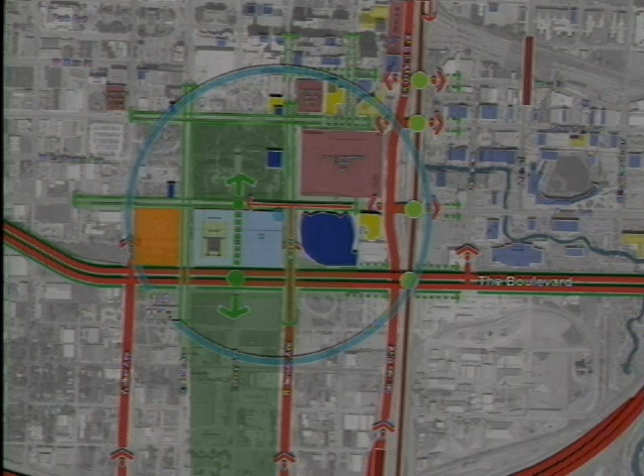We also developed very basic planning diagrams for the building on the site to confirm that the program fit and that everything worked.

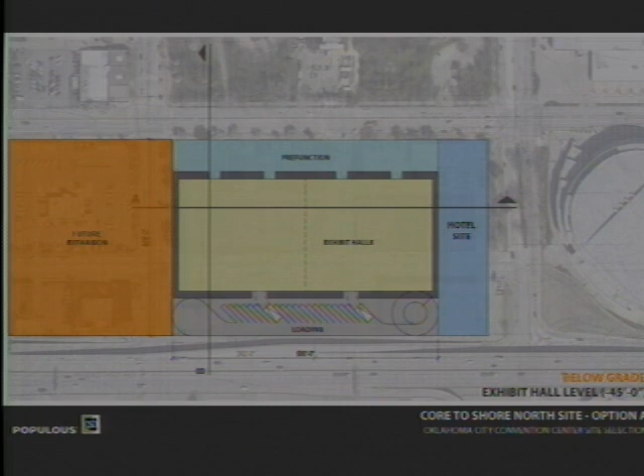We developed several development options for the recommended site. The primary option involves dropping the exhibit hall below grade—the windowless portion of the convention center where trade shows are held—so loading and the exhibit hall would be below ground, while the ballrooms and meeting rooms with pre-function halls and lots of glass would be at street level. This allows a truly 360-degree building with no back door visible.

Because of this site's proximity to the Myriad Gardens, the new boulevard, and the arena, there's no obvious back to the building, so this strategy lets us treat all sides as the front. Above that are additional meeting rooms, and you can see the future expansion parcel and hotel parcel on the site.

This diagram shows how that arrangement works, with the large windowless space below ground and a glass box above ground. Importantly, much of the building mass is buried, so it will look dramatically different from the existing Cox Center. The convention portion of this building would only be about 50 feet tall, with a lot of glass, windows, and street activity.

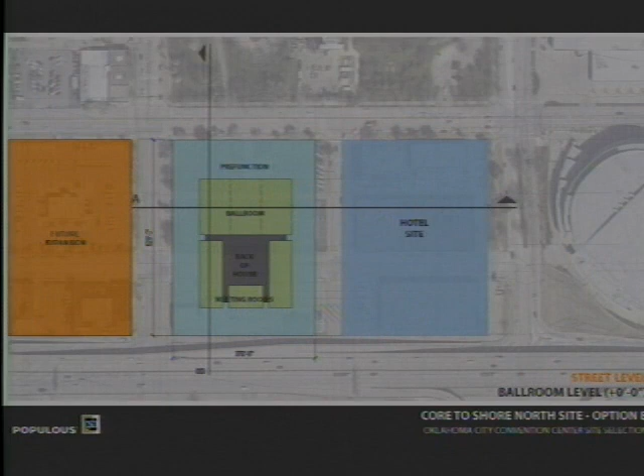We also studied another option keeping the 360-degree exposure at ground level, placing the exhibit halls on top, which allowed the Harvey Street spine to continue through the complex. This diagram shows that elevated exhibit hall arrangement—it makes the building taller but doesn't use a below-grade exhibit hall.

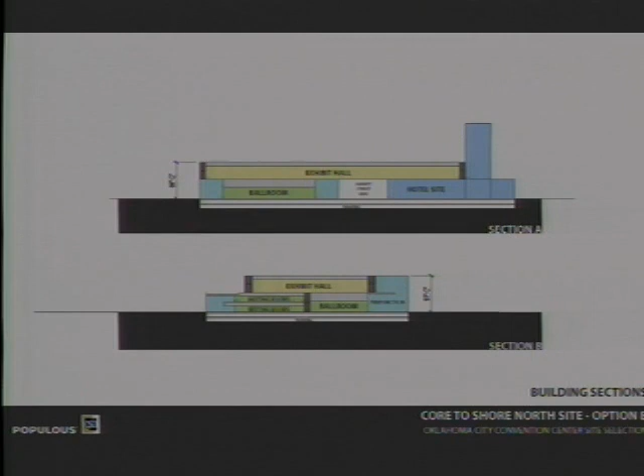We communicated with Flintco and others who have built extensively downtown to test the feasibility of these strategies, and we feel confident in both the costs and technical feasibility. These are some basic diagrams developed to illustrate these ideas.

This is option A. You can see the illustration of a 360-degree building with the hotel adjacent, and the gap running between them, which continues the Harvey spine from Myriad Gardens through to the new Core to Shore Park to the south.

Forgive me, let me scroll back to that graphic. There we go—you can see that spine at grade passing through the block, with the hotel offering great views overlooking the gardens and the park.

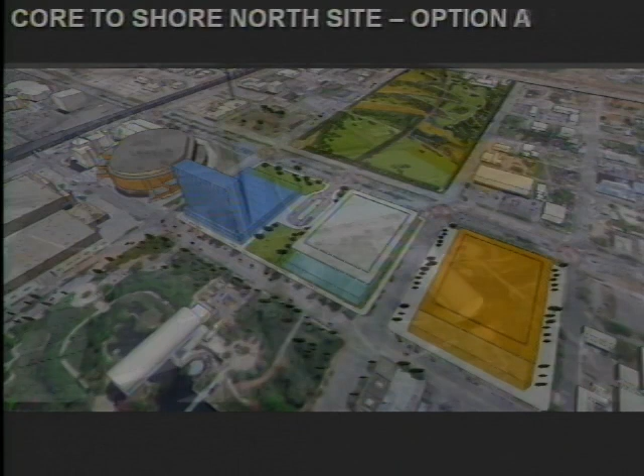This is another option in which the exhibit hall is elevated—you can see it expanding to the west over Hudson, with the spine passing between the hotel and the convention center.

Another option we discussed was that at some point in the future, when the exhibit halls for the existing Cox Convention Center were no longer needed, we could occupy the southwest corner of that existing Cox site as a potential hotel site, and leave some open space on the end of the convention center site to connect the two parks, and also connect us more with the Ford Center, potentially becoming a grand outdoor space. When we win the NBA championships, that's the place where everybody spills out into the street and has the street party.

So some thoughts about how we might develop this site. When the project goes into full design, these will be developed and refined, and an actual design solution will be proposed.

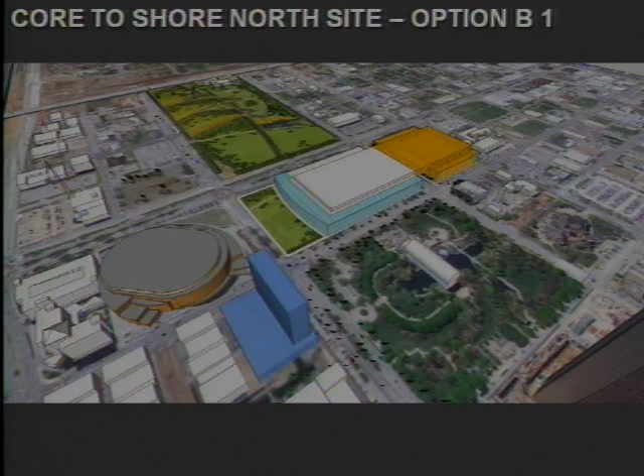Through the process, we created a list of pros and cons for all these sites, enumerated here. Proximity to the existing parking stock, restaurants, and hotels were important. This is an incredible civic address on the boulevard, on the park, across from Devon Tower, adjacent to the Ford Center—a great front door for a substantial building that will represent our city.

We felt like the strengths, both intuitively and objectively in our scoring, were evident. We were thrilled that the Convention Center Subcommittee, when we brought this recommendation, voted unanimously in support of it. So we felt there was a lot of consensus that this was a really strong site.

That is a quick tour through our process and the results of our analysis and selection, and I invite any questions you have about the work that's been done. Are there questions?

Eric, you have any comments you want to add? I think the only other item I might add is with your recommendation for approval today, this would be scheduled for the City Council meeting on July 5th. We would then have another presentation made to Council at that time with the full report, similar to what we've seen today, to make sure Council fully understands the process we've gone through since February. But with that, that would be our next step.

Ryan, I want to make sure I understand this—I think I do. The options that have been presented are still out there to be decided. The only thing we're deciding today is the recommendation for the location. Correct. That will be further studied, and there will be more recommendations made later, but the only thing we're looking for today is a recommendation on this particular site.

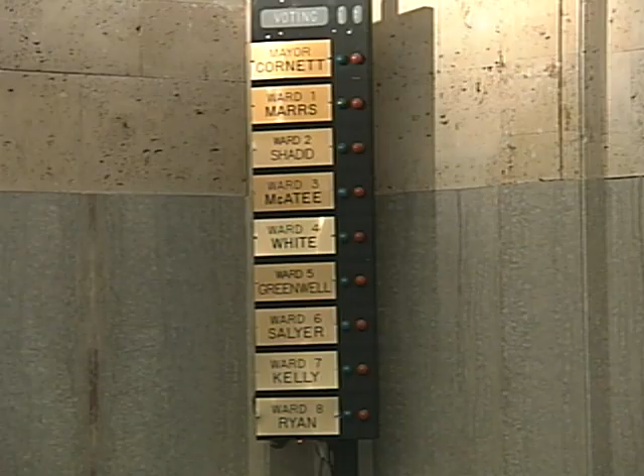If there's no further discussion, all in favor say aye. Aye. Opposed, say no. The recommendation is adopted, and we'll move forward to the council for their action.

I think Eric said on July the 5th. Thank you for your interest and your attention to this. Ryan, thank you for your presentation.

We appreciate that. Item B under reports is relating to the River Racecourse lighting improvements. Eric, you want to brief us on that? I'd be happy to. We are moving very quickly ahead on two of the early start projects for the Oklahoma River.

One of those is the River Racecourse lighting project. As you recall, we engaged Garver engineers to develop a plan, and they have now completed a preliminary report, about a 30% document when we look at the overall scheme of things. What's included in your packet is a draft report. They have since completed that report, and today we're asking for you to allow us to move forward with the completed report, taking it on to City Council.

There were very few changes between the draft and the final. It was mostly just a final review going through the subcommittee. The subcommittee considered this on the 14th and recommended its approval as well. We have Curtis Brown with us today from Garver, and he has a presentation to give to you and can answer any questions you might have.

Thanks, Curtis. Pleasure to be here. A quick overview of the race course lighting project: we are lighting the river basically from Byers Bridge all the way to in between the I-35 bridges, which is the 1,000-meter mark. We are going to be establishing both practice level, which is base level lighting, and event level lighting for the higher profile televised events, which was the desire of this project.

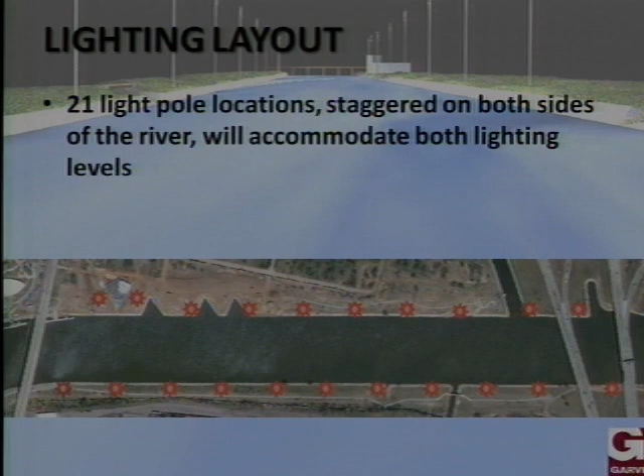The layout from our early design was 21 light pole locations, staggered on both sides of the river, and this layout will accommodate both lighting levels. No additional poles are needed. If you go to the higher lighting level, you just add some luminaires on top of these poles, and I'll discuss why that is in a moment.

There are 10 major points of service that OG&E will be coming to. Each one will serve 2 or 3 poles as it goes through, and those will be controlled by a wireless controller where the central hub is located back in the finish line tower, where each pole or series of poles can be controlled through that network. That's a general overview of where we started and the concept of this.

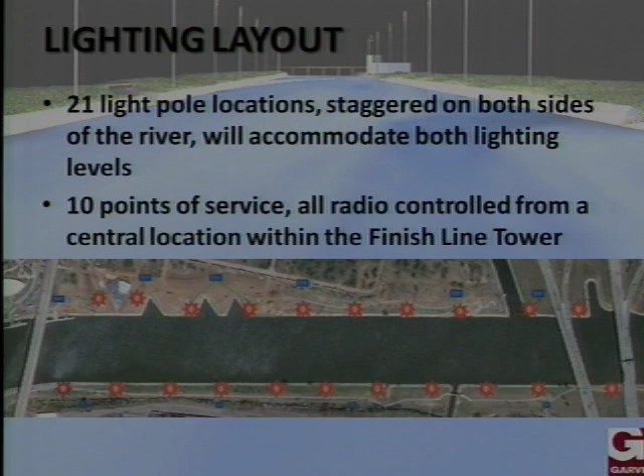The lighting controls, some of the desires were to have flexibility, not only for the base level lighting, but for the event level lighting, future architectural or special lighting, and also PA, television systems, and others. So the main controller will be expandable, with different modules, controlled through a touchscreen interface, and also have a link through other wireless controls so somebody does not always have to run up to the finish line tower to control the lights, but through an iPhone app, even be able to control the lights down on the race course and turn things on and off.

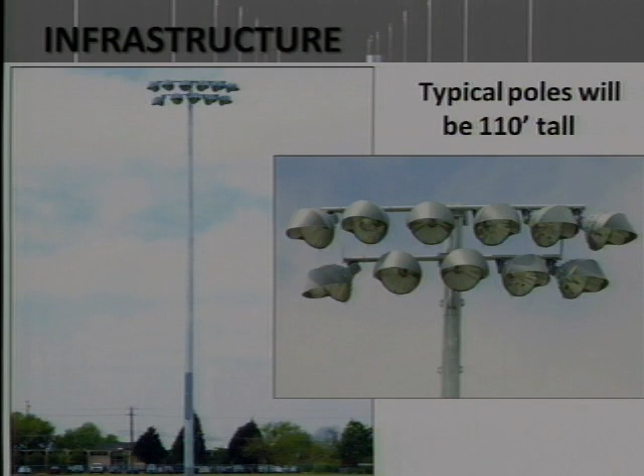A typical light pole we're looking at is the example right here. They're about 110 foot tall with luminaires similar to this located on top of them, and again 21 of these all the way down the shore.

The interesting part of the conceptual design is really trying to discover what we needed to light the river at. There are no industry standards for rowing, kayaking, or other nighttime events. This is the only venue of its kind in North America, so these standards aren't set. We looked at other venues and set a base level lighting for our first pass at 30-foot candles, and a televised event lighting of about 75.

This was determined because most NCAA sports and arenas have lighting levels in excess of about 100-foot candles, with lower levels for practice, but NASCAR, for example, has lighting levels around 30 to 35-foot candles, so it's a pretty wide range. It really depends on the size of the target object. Like a baseball arena, a very small object moving very quickly across a very short distance, you need a very high lighting level in order to be able to pick that up on cameras and visually.

While NASCAR involves very large objects traveling on a 2-mile track, relatively slow relative to speed, they can have a little lower lighting intensity and still have very good visibility. So we kind of weighed these factors in on the sculling and kayaking events, and that's where that came from.

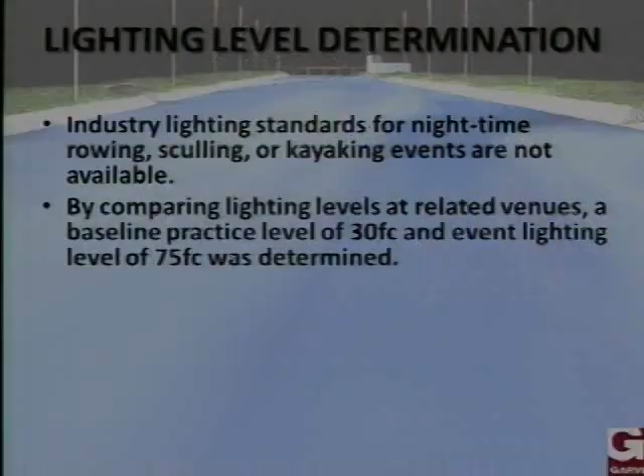After we set these events, we did a mock-up study. We set that up, not only having people out there looking at it, but also setting up a professional television camera rigged to a recording device and a TV monitor, so you could actually stand out there and see what this would look like under televised events.

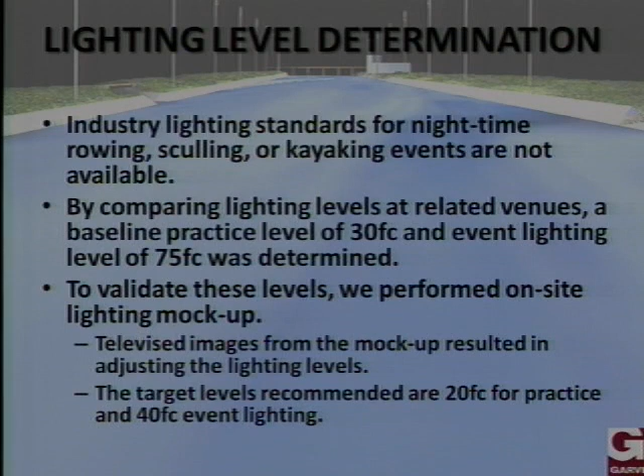The TV cameras did have great visibility at this, but they were at their maximum aperture setting, so if other lighting elements came in, it'd be very difficult for them to adjust. So that 40-foot candle level would be important for those televised events.

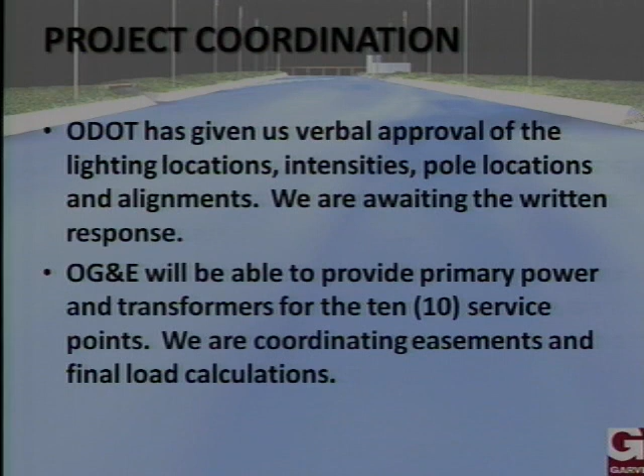Preliminary cost estimate for this base bid—and again, the base bid is just for the practice level lighting, 20-foot candles—we're looking at just about $2.5 million total, which is well within our project budget of $3 million for this element. But also, through the discovery of all this, there are some recommended design alternatives that the River Committee and the master planners came up with that we evaluated. We had 9 in total, and we're recommending 4 of these to be seriously looked at and incorporated as bid alternates into the design documents.

The reason for this is mainly because these alternates—like one option being a greater setback of the lighting poles—need to be done now, because they're not something that can be retrofitted later. Others are to also achieve the greatest visual impact and cost savings in erection. We'll walk through those.

The first one is a high-profile event lighting design alternate, going from the 20-foot candles to the 40-foot candles level. This also includes realignment to the North Shore poles.

The first two poles, closest to the finish line, are actually set back about 75 feet from the shoreline, mainly to stay clear of the line of sight of the judges' station within the finish line tower, so they have a clear, unobstructed view of the river.

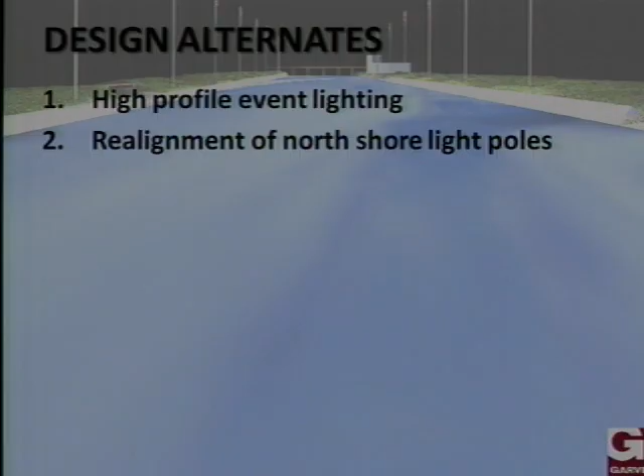With the master planning, there's a concern that having two poles set back and the others set forward impacts the linear look they want for the boathouse district. Coordination with future boathouses matters too, since a lighting standard setback now means that a boathouse built a year or two from now won't have a pole sitting at their front door, and it creates the same visual impact all the way down the river.

So that was the cost of setting those back. Next is the triangular fixture array. Instead of the traditional square or rectangular fixture array, they want to continue the angular look of the boathouse district and blend in, arranging the lights in a triangular fashion versus a rectangular one.

The last recommended option is a 25-year warranty, which I'll talk about in a moment. For the high-profile 20-to-40 option, the base level is 2 rows of 7 lights for 14 fixtures total, and it adds another 2 rows for a total of 28 fixtures.

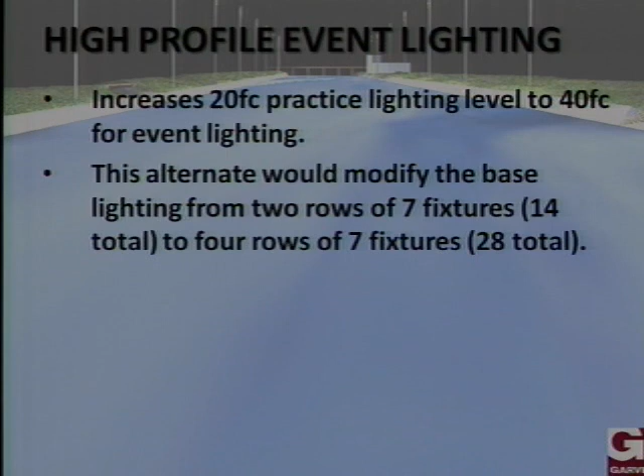These circuits would be interchangeable, so if they're doing practice level, the bottom rows could burn, then the next day the top rows can burn, cycling back and forth. This gives greater cycling time and burn life on your bulbs, and the ability to cycle both on together.

This event alternate adds about $870,000 to the project, which brings the base bid plus the event level to about $3.4 million.

Realignment to the North Shore poles: again, the first two poles are set back at a greater distance. When we set back the other poles, we need to set them back another 50 feet. This raises the pole height from an average of 110 to 130 feet, so we maintain the same striking angle against the water, and it increases the number of luminaires as well so we get the same intensity.

As we're set further back, we need to maintain the same intensity. So that's the cost of this realignment, and it'll keep all the poles on the North Shore, all the way to the I-35 bridges, at the same setback.

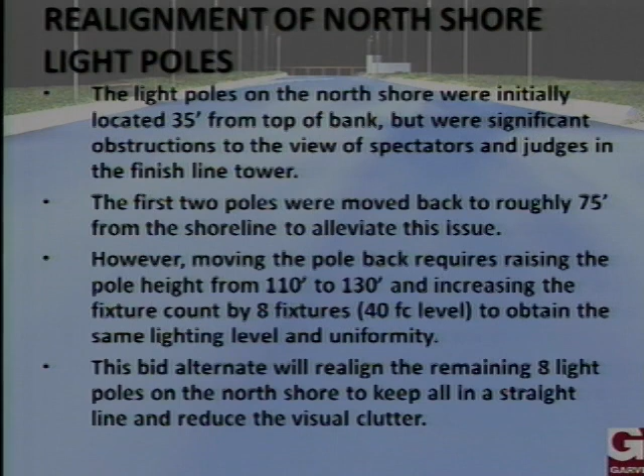This alternate is about just shy of $600,000 - $558,000. If you take just this alternate with the base bid, you're looking at about $3.1 million, or if you take both alternates, it's about $3.9 million.

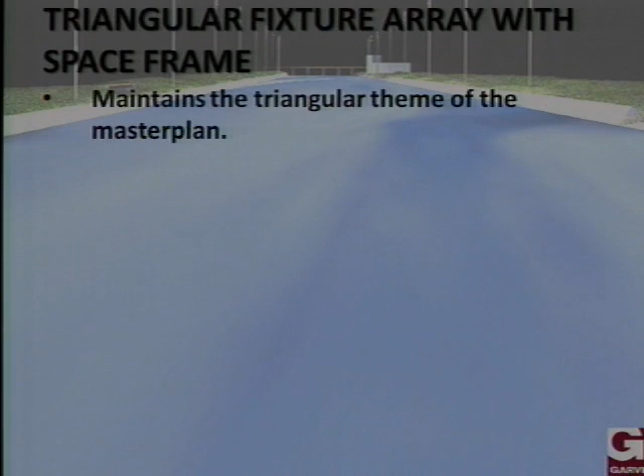Triangular fixture array, again maintaining the triangular theme of the master plan. It really helps illustrate the destination aspect of this venue. This is one of the most visible venues - as you're driving down I-35, these poles are right there on the bridges.

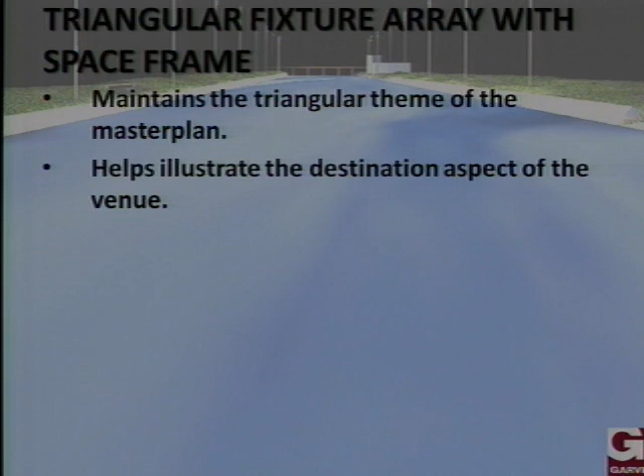Having that architectural feature right next to the bridges draws your eye to it and leads your eye down the river to the Boathouse District, defining that as a corridor and really making it a focal point of the site.

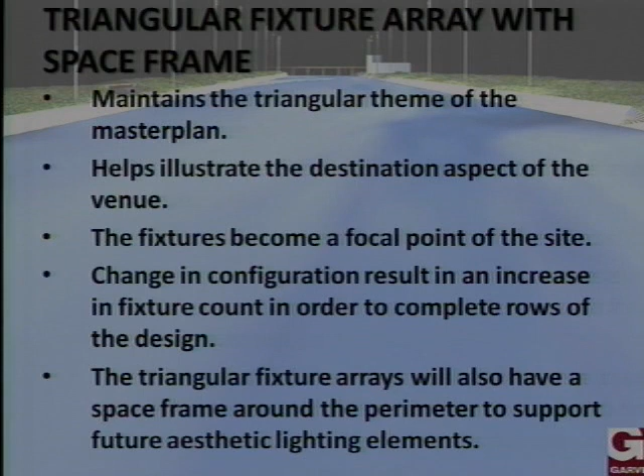This triangular array will also have a structural steel space frame around it that will serve to mount future architectural lights. They're going to do linear LED strip lights around these space frames, so in the future the stadium lights can be off, the architectural lights can be turned on, and it'll create a very dynamic impact and visual cue. We're providing the infrastructure for those.

The cost of doing this with the extra rows and the space frame is about $740,000. A base bid plus this is about $3.2 million, and the total with all alternates recommended so far is $4.7 million.

Final alternate we're recommending to be incorporated is a 25-year warranty. Many manufacturers offering these extended warranties will offset the actual cost of an on-call service by usually more than 50%.

By doing this warranty period, they're able to cycle and cluster the relamping so you don't get 5 light bulbs burnt out, replace those 5, and then have them burning about 20% hotter than the rest, causing differences in uniformity. This maintenance program and cycling of fixtures keeps good uniformity of burn throughout all your fixtures, and it saves those calls.

Preliminary cost estimate: we're estimating around $287,000 for this warranty, and for bringing everything to date with all alternates, about $5 million.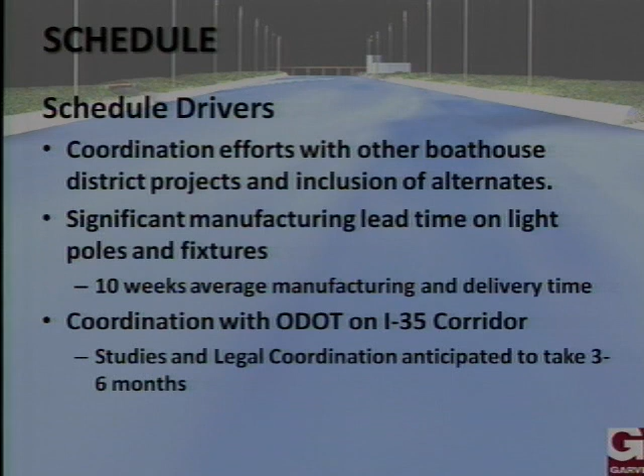With those schedule drivers, this is our tentative project schedule: bidding in September, starting construction in November, doing infrastructure starting in December, the site work and laying in all the utilities, and then the poles are fabricated and delivered in February and installed, with the full system up and operational in late May and June.

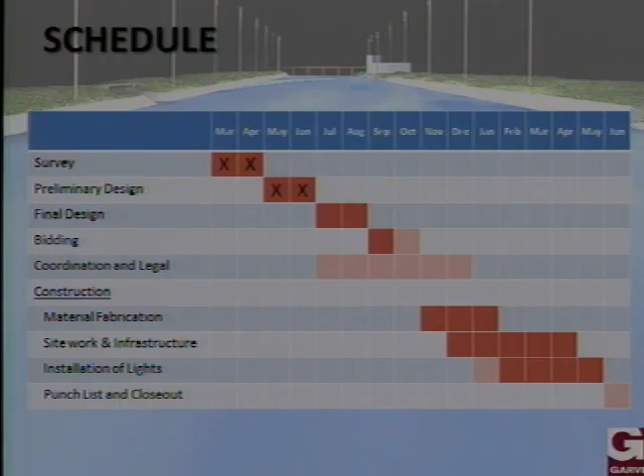One of the things we're looking at in the schedule is working some phasing, trying to get the first 500 meters lit and operational, then working on the second 500 meters. That way, some of the nighttime sprint events or other things that could happen in March and April are possibly accommodated.

That was an awful lot, so let's open it up for some questions and discussion.

So what you're seeing is a series of options being considered so that when bids are received, and if we receive some favorable bids, we have the opportunity to add some items to the contract at that time. So today, there are estimates.

You're going to also see in some of the reporting that there are contingencies included in those estimates until the final plans are complete. So we would expect, in all probability, that maybe one of the alternates could be selected. We don't have to decide that today, and that's something we can decide at bid time.

But we are going to go through this process on numerous projects where you're going to see a lot of variety, and then once we get ready to award a contract, we will have to make a decision at that time to move forward. Eric, in thinking about a $3 million budget for the lighting project and a $60 million budget on the river,

is it possible to decide to spend $5 million on this and $2 million less on something else that's included in the 60? Or what is the flexibility that's involved here?